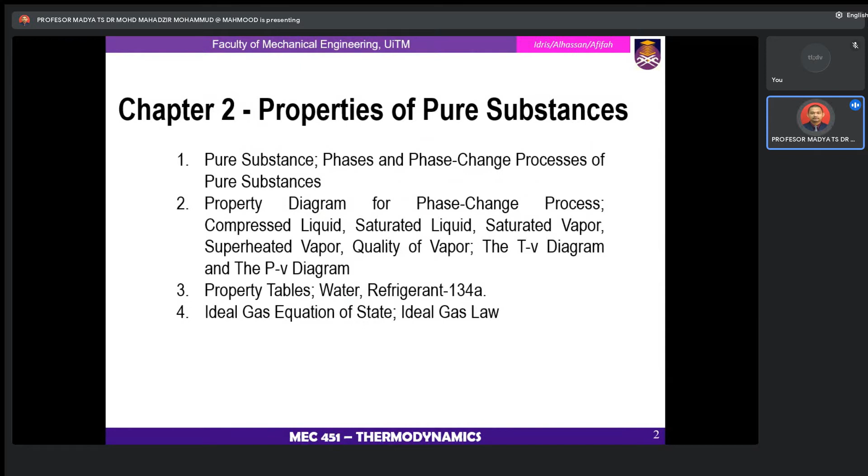So we go to part number 1, pure substance. As usual, before we go further in this chapter, we have to know the definitions of the terms that will be used in this chapter. First is pure substance. What is that? A pure substance is a substance that has a fixed chemical composition throughout. That is the definition of pure substance.

But if you look at statement number 2, a pure substance does not have to be a single chemical element or compound. A mixture of various chemical elements and compounds also qualifies as a pure substance, as long as the mixture is homogeneous. For example, air. Air is a mixture of several gases, but it is considered to be a pure substance, because this mixture is homogeneous. So a mixture of liquid water and water vapor is a pure substance, but a mixture of liquid and gaseous air is not.

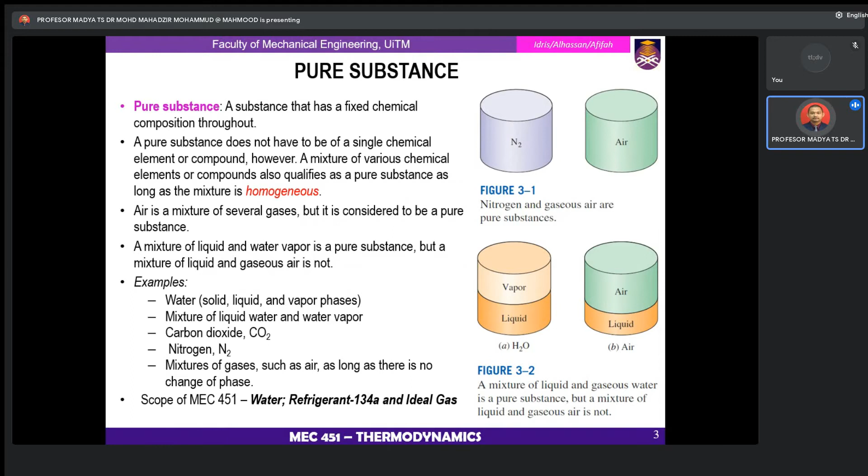So for this scope in Thermodynamics 1 and for MEC 451, we only concentrate on water, refrigerant 134A, and also ideal gas. So let's look at the phases of the pure substances. Actually, the substances exist in different phases, as mentioned here, three physical phases: solid, liquid, and also gas.

So the definition for solid is the molecules are arranged in a three-dimensional pattern. In theory, the high force of attraction between each molecule keeps them in fixed positions. That is, this substance becomes a solid. If it's in the liquid phase, what happens? The molecules are no longer at fixed positions relative to each other, and they can rotate and translate freely. And that is if the phase is liquid.

And if the phase of the substance is gas, the molecules are far apart from each other and the molecular order is nonexistent. The molecules move randomly, continually colliding with each other and the walls of the container they are in. That is when the substance is in the gas phase.

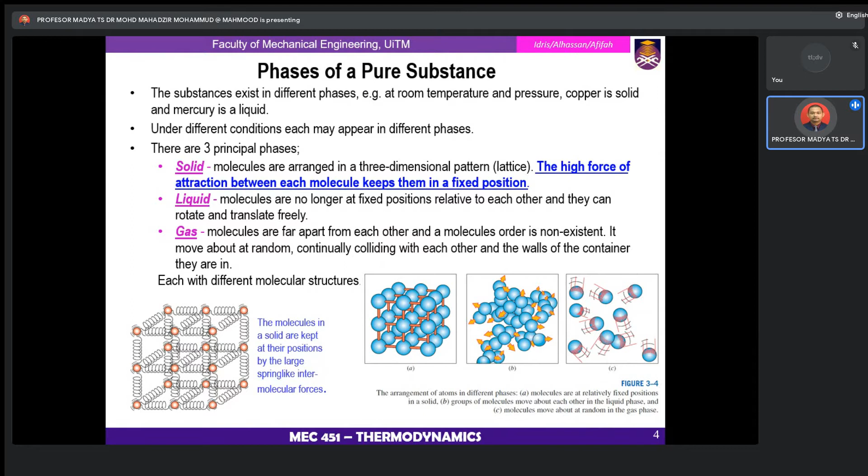There are many practical situations where two phases of pure substances coexist in equilibrium. For example, water exists as a mixture of liquid and vapor in the boiler and the condenser of a steam power plant. Another example is the refrigerant, where the substance in the refrigerator can change phase from liquid to vapor in the freezer. So this section focuses on the liquid and vapor phases and the mixture of these two.

So all pure substances exhibit the same general behavior. I will show two experiments of boiling water that show the behavior of pure substances. Number one, on the temperature versus specific volume diagram, where we increase temperature at constant pressure. And number two, decrease pressure at constant temperature, shown on the pressure versus specific volume diagram.

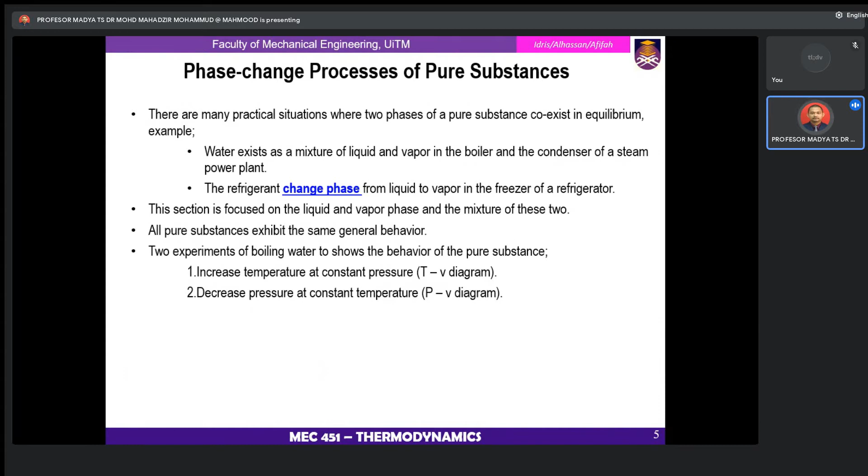So this is experiment number one, where we increase the temperature at constant pressure. When the experiment has been done and the result is plotted on temperature versus specific volume, the graph obtained is as plotted. State number one, two, three, four, and five represent the situations of how this experiment occurs.

First, we heat the water at the pressure 1 atm, temperature 20 Celsius. We heat the water in the liquid phase. In these conditions, the liquid is a compressed liquid. At state number two, heat continues to be given to the compressed liquid, and the temperature of the water becomes 100 Celsius. Looking at the T-v diagram at 100 Celsius, the pressure is still 1 atm. Water exists as a liquid that is ready to vaporize.

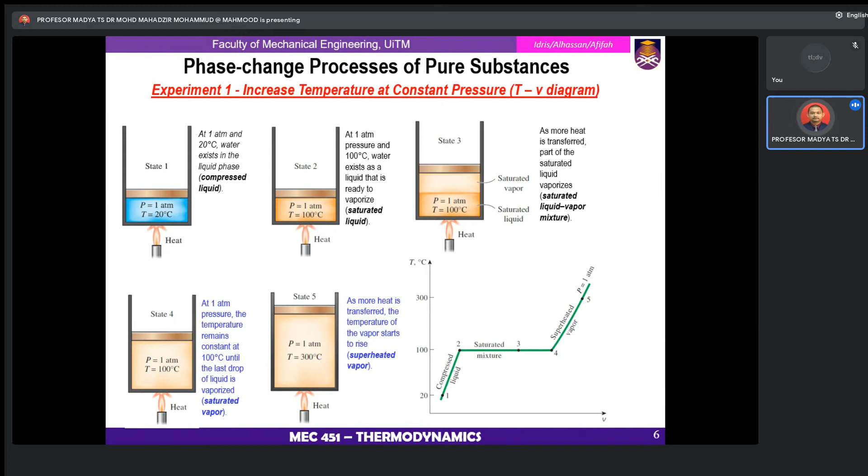So now I will try to give you the knowledge of the T-v diagram of constant pressure phase change processes of pure substances at various pressures, for water. So in this diagram, temperature versus specific volume, the line in the graph is a pressure. So when the pressure increases, we find that water will start boiling at a higher temperature.

Okay, so this is the critical point. So it will boil. This is a saturated liquid. As you see here, the temperature is different. Specific volume of the saturated liquid increases. And specific volume of the saturated vapor decreases. So here, small v is decreased, from low pressure to high pressure. That is the significance of the result that we found from this experiment.

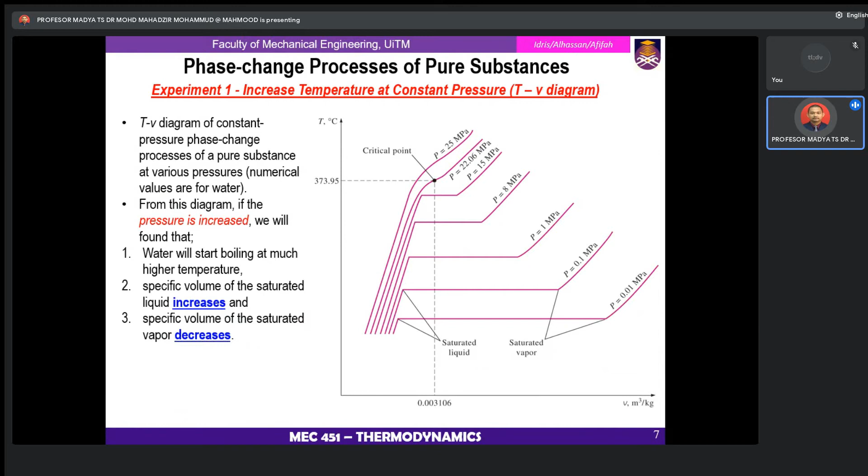So as the pressure is increased further, the saturation line will continue to get shorter, and it will become a point when the pressure reaches 22.06 megapascal. So this point we call the critical point. I show this point. The critical point is a point where the saturated liquid and saturated vapor states are identical. They are the same. So the temperature, pressure, and specific volume of the substance at the critical point are called respectively the critical temperature, critical pressure, and critical specific volume.

So at pressure above the critical pressure, when the pressure is in this line above the critical pressure, there will be no distinct phase change. There is no change anymore above the critical point. So it is customary to refer to the substance as superheated vapor at temperature above the critical temperature and as compressed liquid at temperature below the critical temperature. That is one important thing you have to know: what happens at the critical point, to the pressure, and to the phase of liquid, mixture, and vapor.

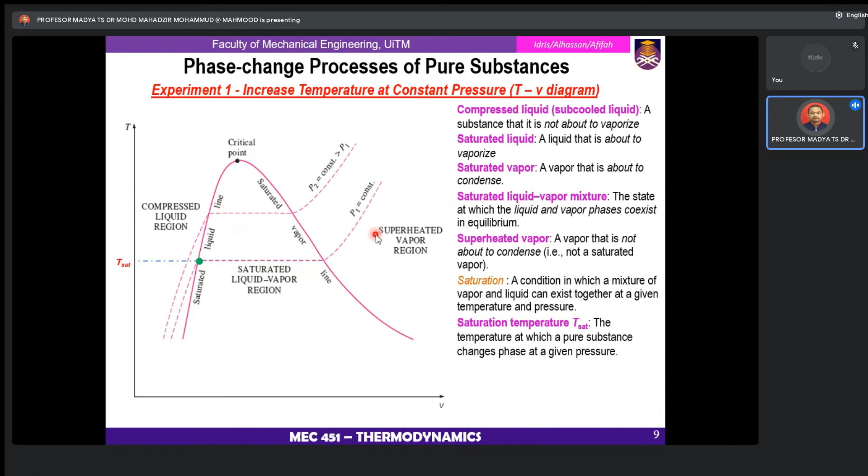Okay, I continue the slide. Okay, still in experiment number 1. So the temperature at which the water starts boiling depends on the pressure. Therefore, if the pressure is high, so is the boiling temperature; water boils at 100 Celsius at 1 atm.

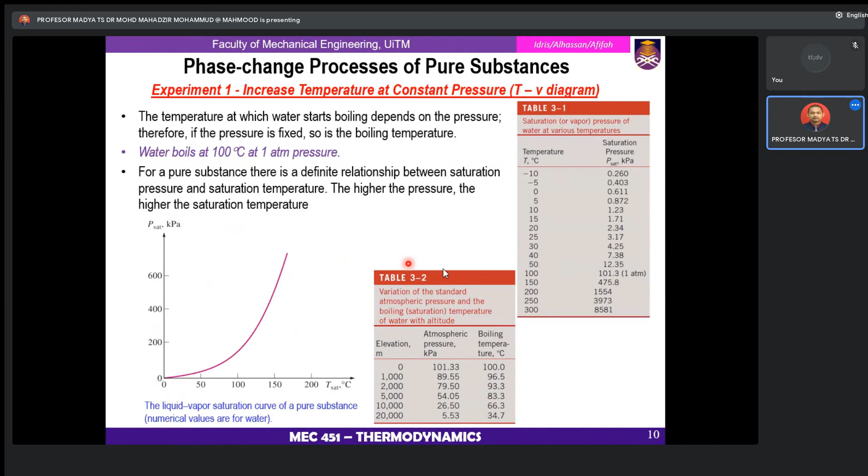Okay, definitions of state of the substance, also PV diagram. So here what I only want to show you is this kind of graph of T versus small v. So based on the state postulate, the state is specified by two independent and intensive properties. So the intersection between two intensive properties is the state.

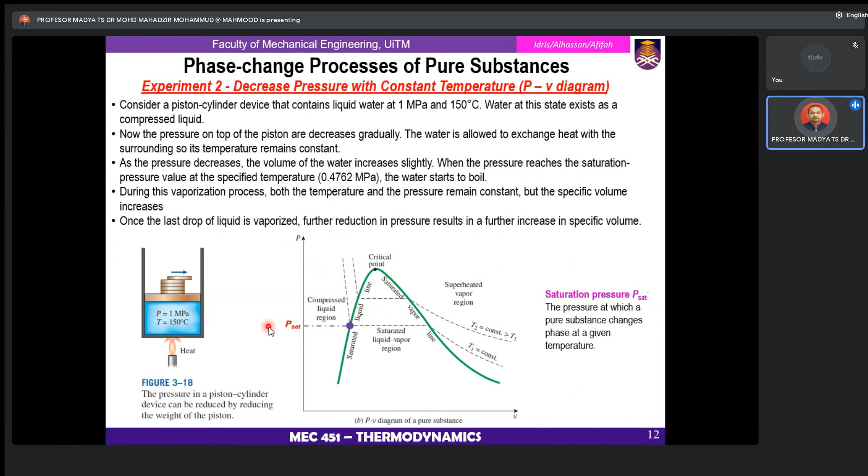This one, as I mentioned, is the same as before, the PV diagram. Every state on the saturated liquid line we denote with subscript F, whether we use V, H, S, or U. Also, if the states are on the saturated vapor line, we call it G: saturated vapor, VG, HG, SG, and UG.

So this is what you can read for compressed liquid. If the pressure of the liquid is higher than the saturation pressure, P is greater than P sat. It is the same as the earlier slide for TV. The only difference is we change the vertical axis from temperature to pressure. So here is pressure versus specific volume.

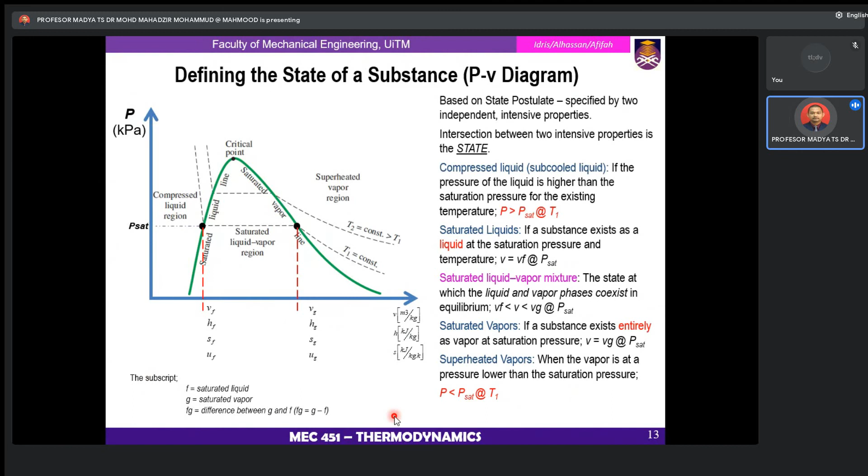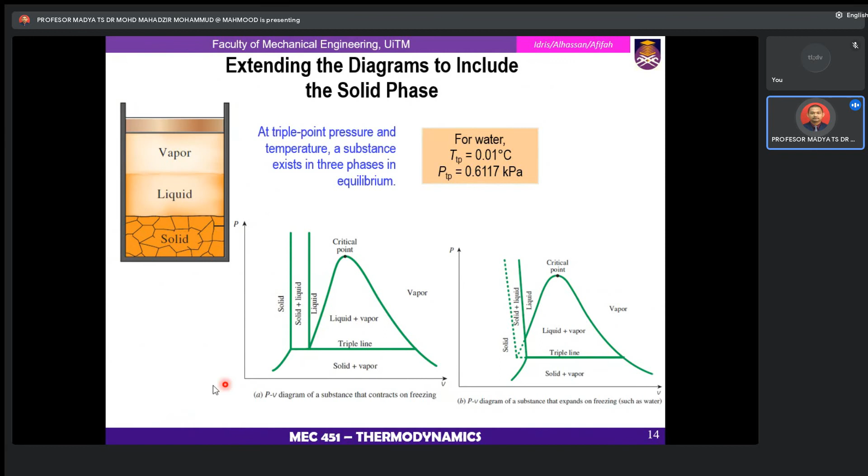It may seem demotivating or quite difficult. As you know, we are learning thermodynamics, thermofluids, so we only focus on liquid, liquid-vapor and vapor. We don't focus on solid and solid-liquid; solid is not of interest in thermodynamics. This is only knowledge of how the PT diagram looks, extending the diagram to include the solid phase.

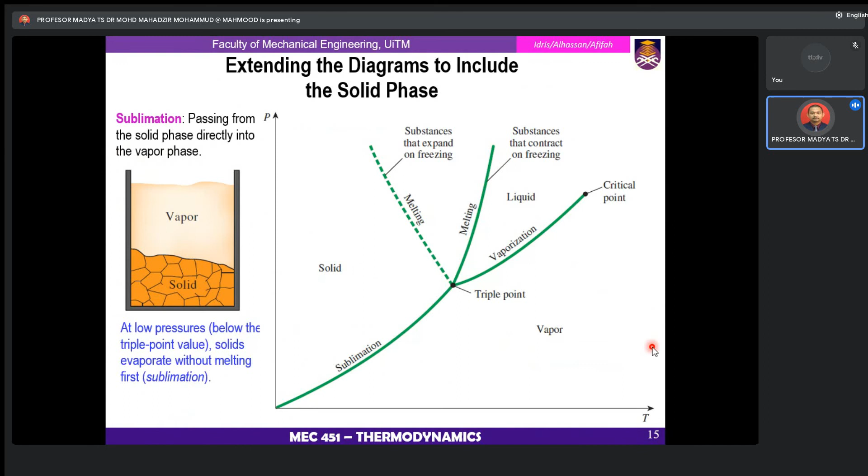But if the substance expands on freezing, at this point, sometimes the solid is also still in the melting phase, and this is expand on freezing. So for liquid to change to vapor, it will cross the line of vaporization, where the vaporization will end up with a critical point. This is just knowledge for you to know about the PVT surfaces.

But in thermodynamics, at your level of first degree, you will only consider the 2D diagram. That means temperature versus specific volume, or pressure versus specific volume, or that kind of cases - just only PV or TV diagram.

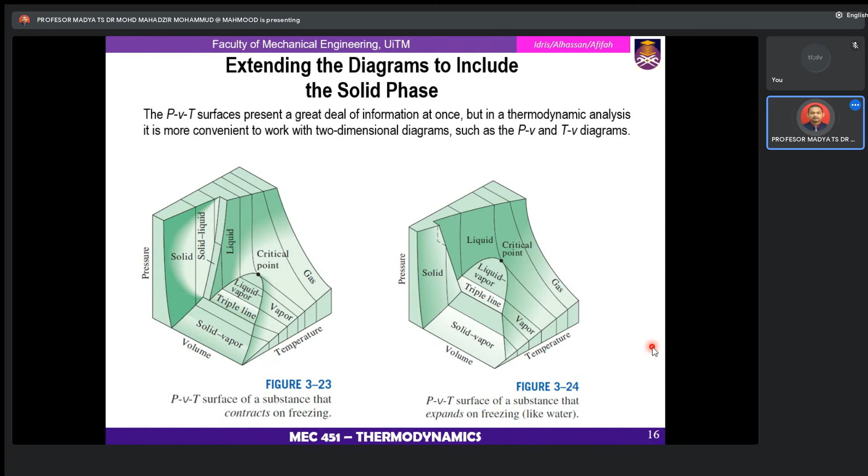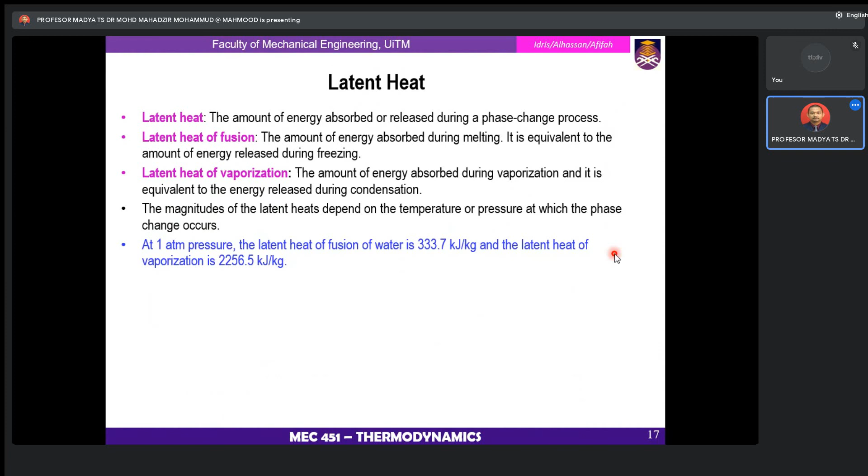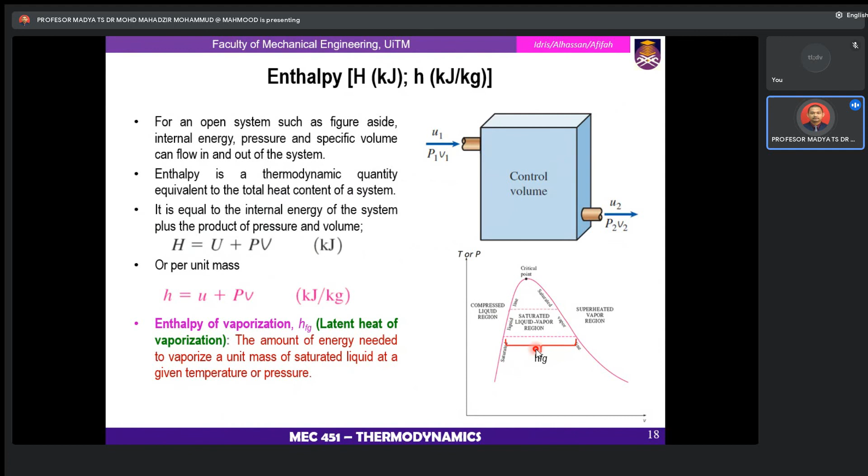Now we come to the properties table - this is part number 2. So that's all for part number 1 in chapter number 2, properties of pure substances. We will continue on part 2 of the chapter. Thank you very much.